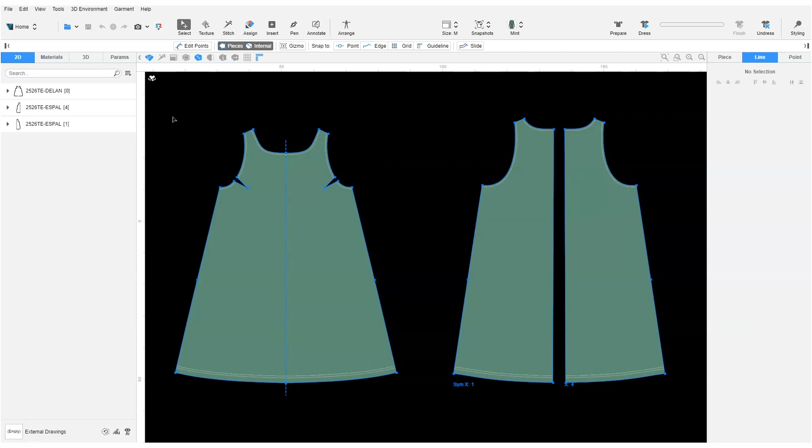To begin, we load the sizes in the grading pane using the keyboard shortcut Alt-G. First, we add the different sizes. We click Add Size and Biggest twice to give us the 2 larger sizes. We click Add Size and Smallest twice to give us the 2 smaller sizes. Then we rename the sizes by double-clicking each one and typing in the correct label.

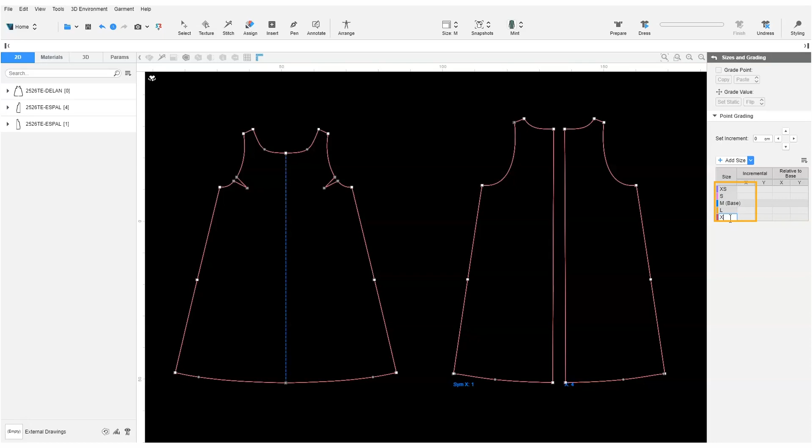Great! Let's get started with grading. To grade a garment, we use the grade points on the base size. The outline of the pattern pieces for the other sizes is plotted by reference to those base size grade points. Grade points on the base size are colored white.

When grading, we need to select a grade point. Note that by default, all corner points of the base size are grade points. However, as mentioned in a previous lesson, we can configure any point on the base size to be a grade point by selecting it and then selecting Grade Point in the Sizes and Grading pane.

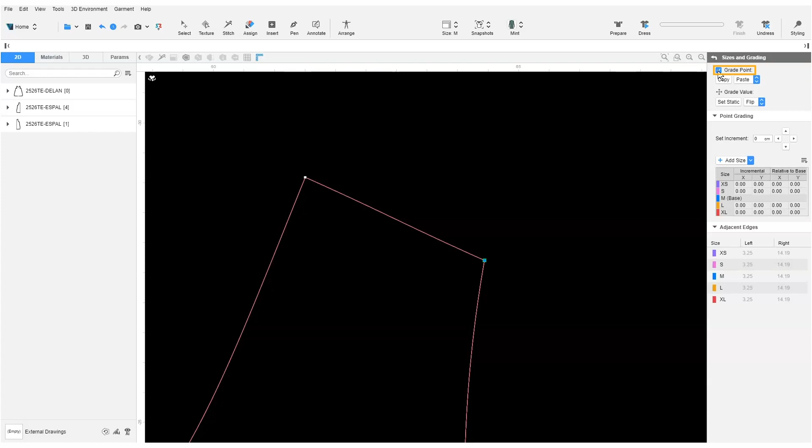There are 2 ways to grade in VStitcher: visually and manually. Let's look at visual grading first. Visual grading is grading using your mouse. In the 2D window, we drag each grade point to where we want it to be. We are simply eyeballing the grading. As we grade, we can see the results in the table in the Sizes and Grading pane.

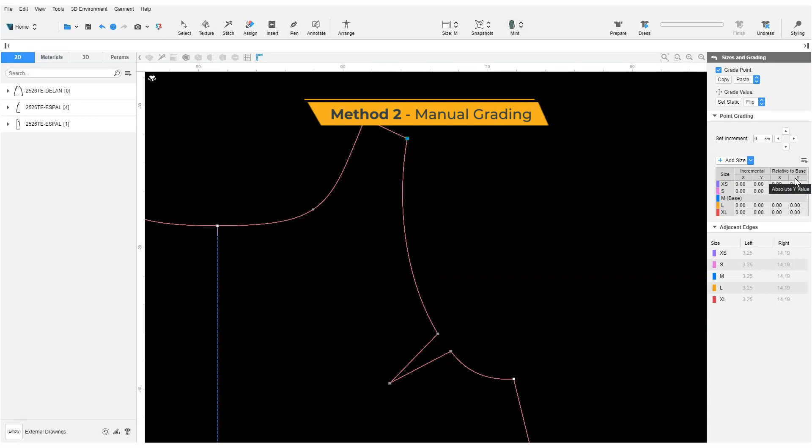If we want to set standard increments for each grade point, we can use the manual method of grading. We do this much in the same way as we would grade patterns in a 2D CAD system. We can make changes to the position of each grade point on the X and Y axis, and make such changes incrementally from the base size grading point, or relative to the base size grading point.

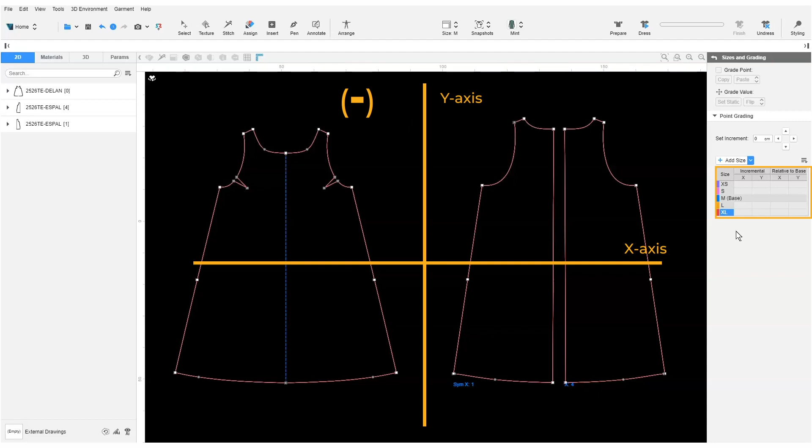Just one thing to take note of: in VStitcher, the use of y-axis positive and negative values matches the approach of typical 3D software, but this is different from pattern CAD systems that use the traditional method. In other words, to move a point up the screen, we use a negative number on the y-axis, and moving a point down the screen, we use a positive number on the y-axis.

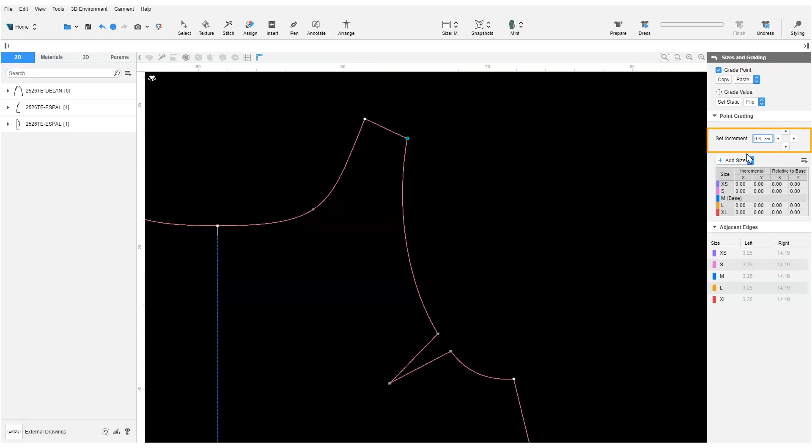To make changes incrementally, we can use these arrows or fill in the increments in the incremental columns on the rule table. For instance, the shoulder point needs an increment of 0.3 on the X and Y axis. We input 0.3 to set the increment value and use the arrows to determine the direction. We will move 0.3 up and 0.3 to the right. The rule table is updated with the grade rules we have added.

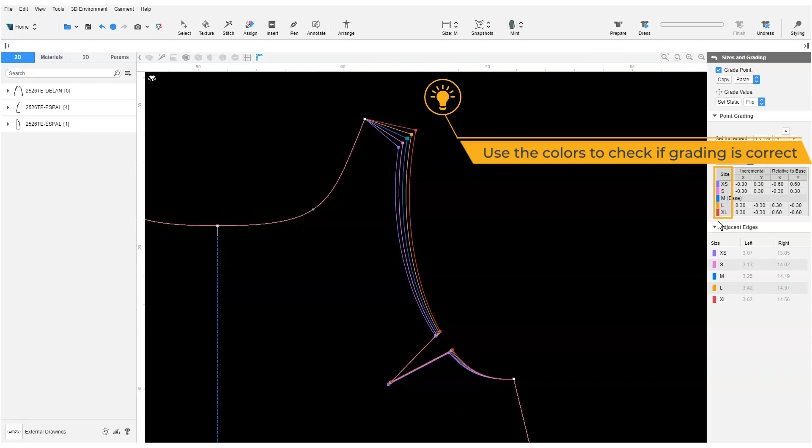In the 2D window, the grading is displayed with each color indicating a size. These colors are the same as the colors indicated in the rule table, so we can check if the grading is correct. On the Sizes and Grading pane, below the rule table, the measurement of the adjacent edges to the point is displayed. When we hover our cursor over a value, the edge is highlighted in the 2D window for easy reference. This gives us an extra way of checking that the grading is correct. Note that the Adjacent Edges section is only available in version 2021.1 and newer.

When using the arrows to set increments, we can see all the sizes have the same incremental value. If we need to set different incremental values on only a specific size, we can input the value into the rule table manually. For example, for extra small and extra large, we want to set an increment of 0.4 instead of 0.3 for both the X and Y axis. We can double-click on the values in the table and edit them accordingly.

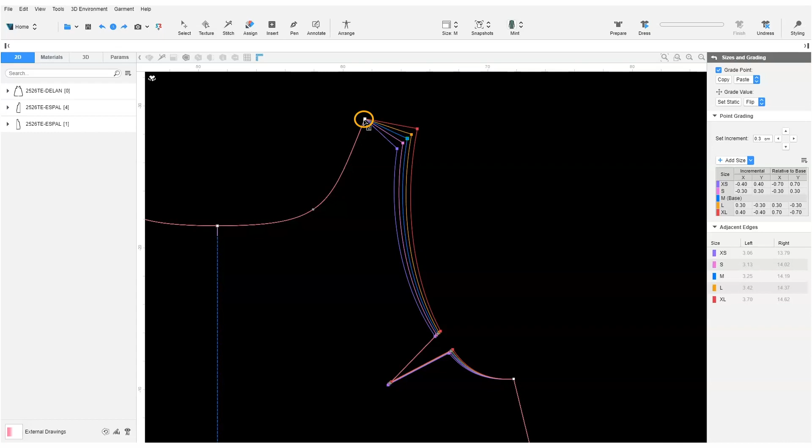Let's move on to the other point on the shoulder edge. It follows the same grade rules as the other point of the shoulder, so we can simply copy the grade rules of this point and paste XY to copy the same incremental values on both the X and Y axis. Under the Paste option, we have options to paste the copied rules on the X-axis only, the Y-axis only, or both.

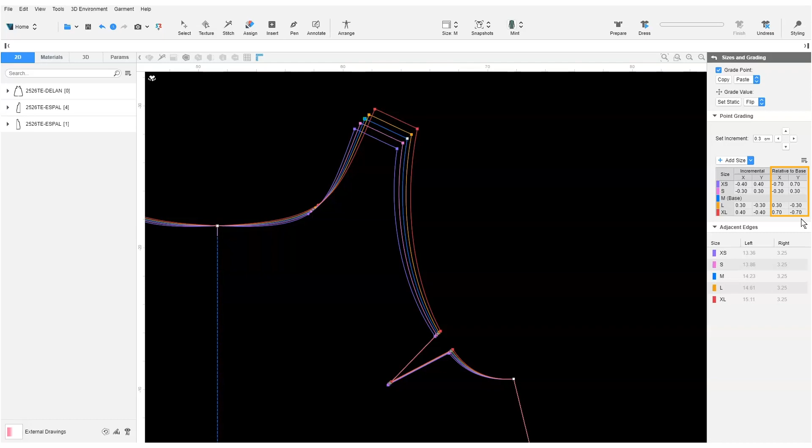Another method of grading is by adjusting the values that are relative to base size. A change relative to the base is the total change measured from that grading point to the base size grading point. Let's adjust the center front grade point. For size small and large, we want to adjust by 0.3 centimeters relative to base. For extra small and extra large, we want to adjust a total of 0.5 centimeters relative to base along the y-axis. As seen in the table, we grade the sizes.

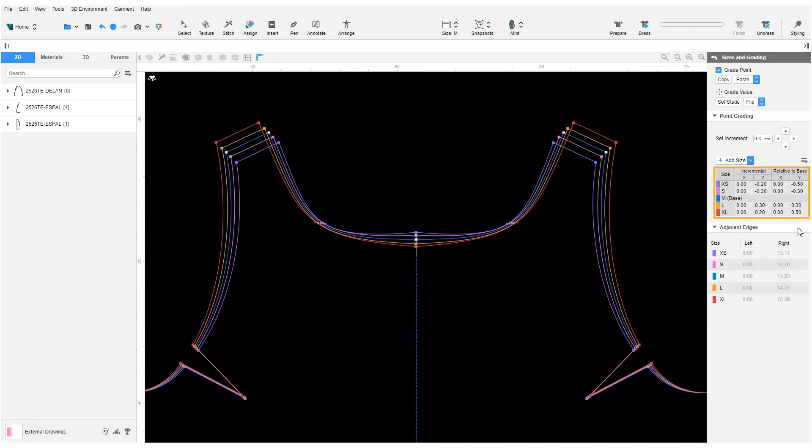The grading settings are dynamically linked, so if we make a change to an incremental value, relative to base is automatically updated, and the other way around.

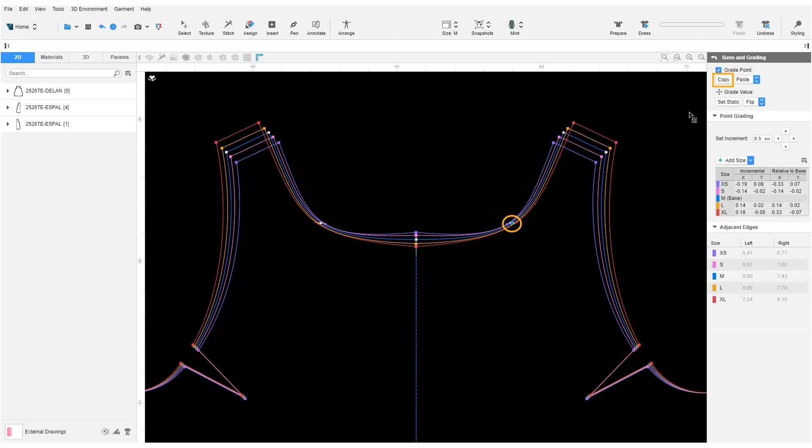The neckline is not even. To fix this, let's change the point along the neckline to a grade point. We copy the grading from the center front and paste Y on this new grade point. When grading, we can multi-select grade points that are using the same grade rules before adjusting the incrementals.

Let's adjust the Y values for the hem points to have a 2 cm increment. And now we have completed the grading for the front pattern.

We can repeat the same process for the back pattern. Alternatively, if they use the same grade rules as the points on the front bodice, we can use the copy and paste functions to quickly and easily grade the back pattern. We copy the grade rules from the shoulder point and paste XY on the back pattern.

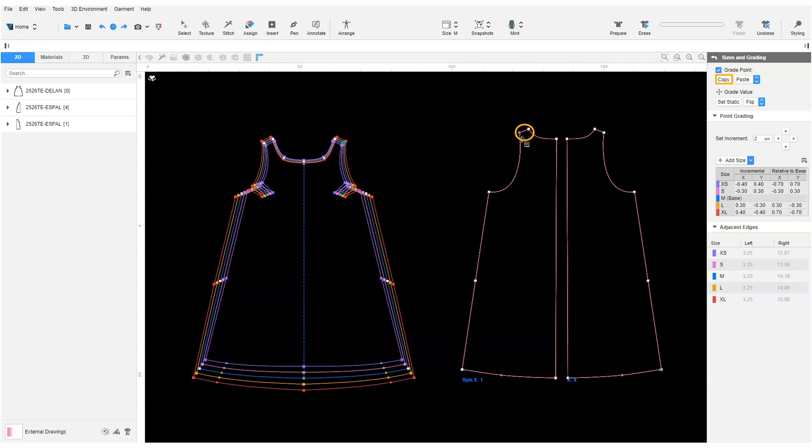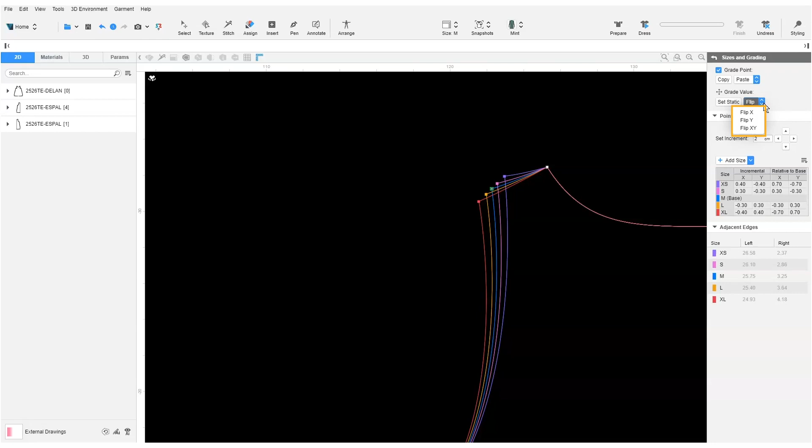Here we see that the grading is incorrect and it is flipped. Let's fix this. We flip the grading by selecting Flip XY. This flips the grading on both the X and Y axis. Similar to the paste function, Flip has options which allow us to flip grading only on the X-axis, only on the Y-axis, or both.

We continue copying and pasting the grade rules from the front pattern to the back pattern, but we paste on the back right pattern so we don't have to flip all the grading.

We have completed the grading for this garment. The last option is setting a static grade point.

Setting a static grade point means that the point selected is the stacking point or the 0 point. This is only if we want to set one particular point to be the stacking point. The default stacking point for every pattern is the center of the pattern, so if we want the grading to be stacked to the center of the piece, then there is no need to set any of the points to be static. Just one thing to note, after a static point is set, it's not possible to change the static point back to be at the center of the pattern.

We would need to undo that action. So if we want the grading to be set at the center of the piece, we know not to set any other points as static. Here's an example of what setting a static point does.

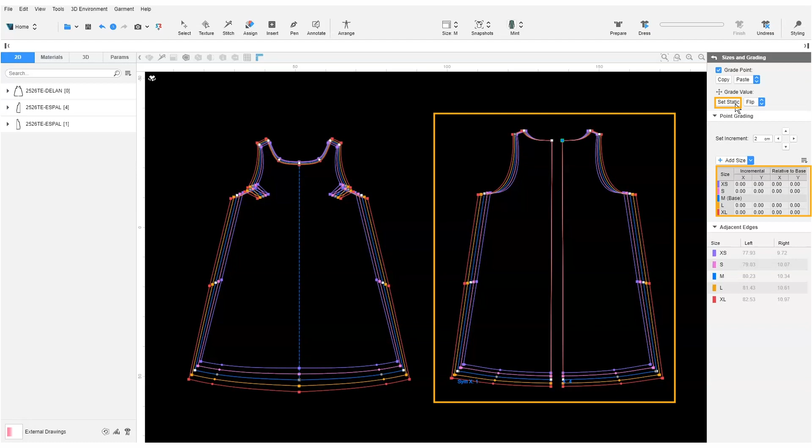And that concludes our look at how we grade a pattern from scratch in VStitcher.